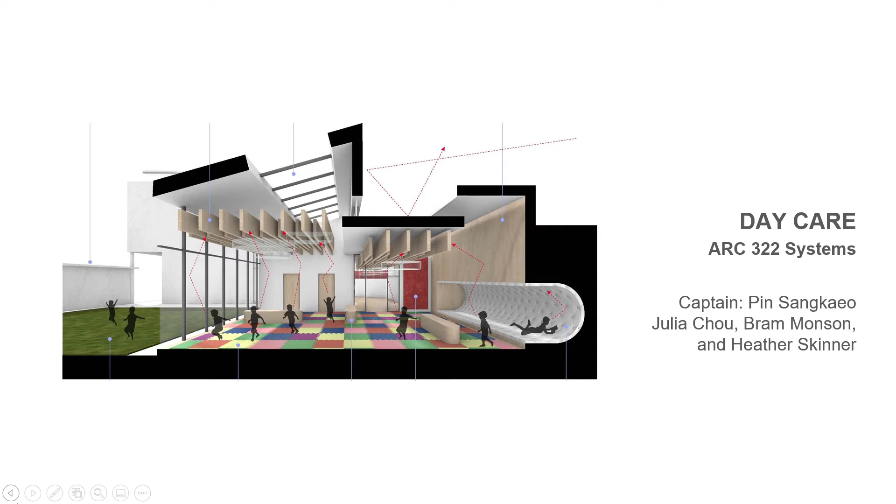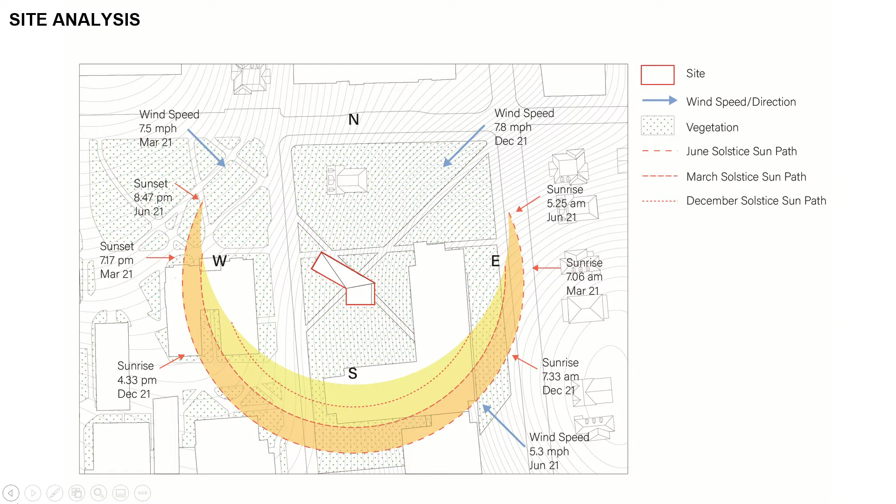Daycare addition at Syracuse University: we joined the additional spaces to the existing cafe in section and in plan. When designing for the daycare, we considered the microclimate analysis we previously analyzed for the cafe and office spaces. The daycare is accessible through the existing cafe circulation and from the exterior courtyard space.

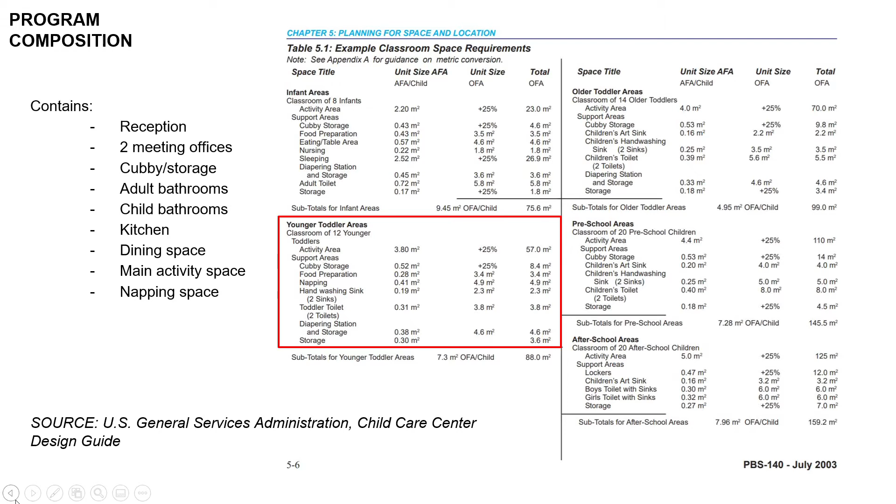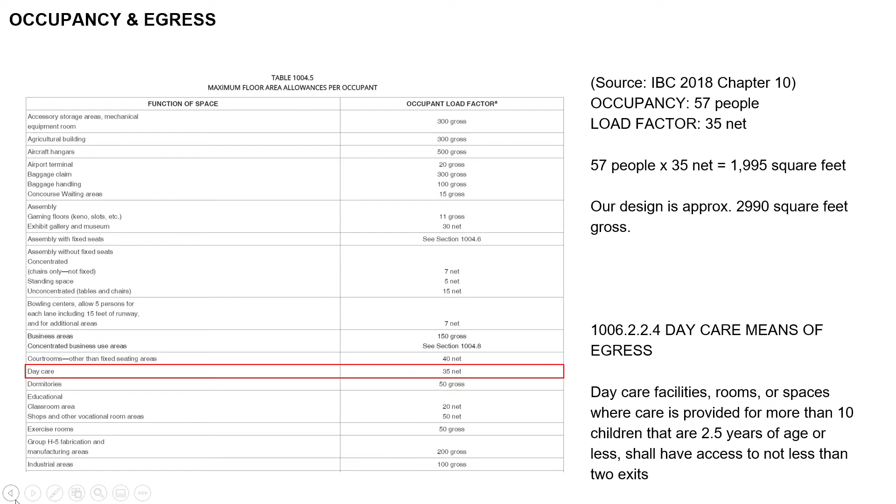The daycare focuses on incorporating high-performance lighting, ventilation, and acoustics. For the program, we incorporated a reception, meeting spaces, cubby storage, adult and child bathrooms, kitchen, dining space, activity, and napping space. The daycare has an occupancy of 57 people, and using IBC Chapter 10, we calculated an area requirement of 1,995 square feet. With the daycare program, there is a minimum requirement of 2 exits, which we have spaced at opposite ends of the daycare for accessible egress.

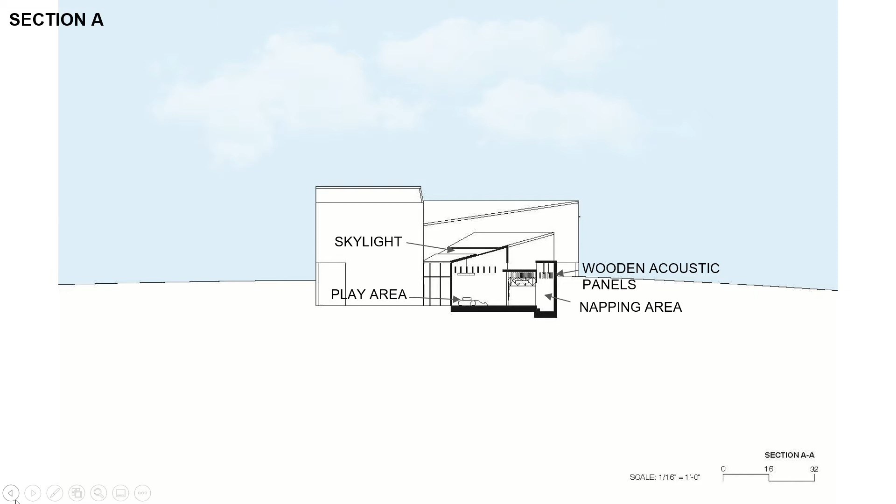The lighting, ventilation, and acoustical elements can be seen in both the sections and renders. We have called out the lighting elements such as the fixtures and skylights, as well as the acoustical elements such as the fabric and wood panels. We highlighted their relation to the individual program in the renders seen in the hallway space and exterior.

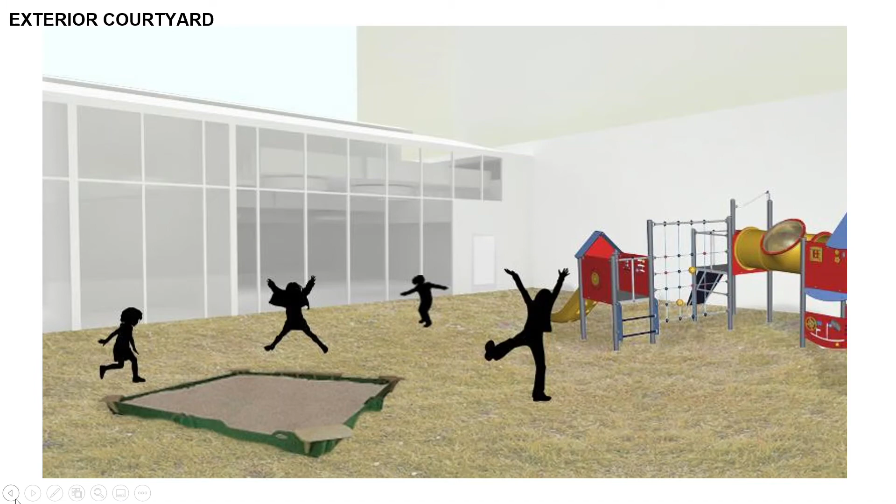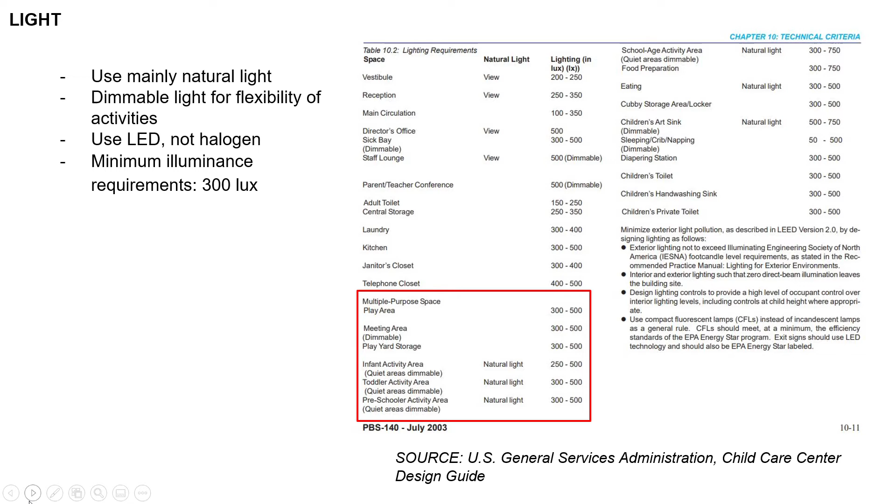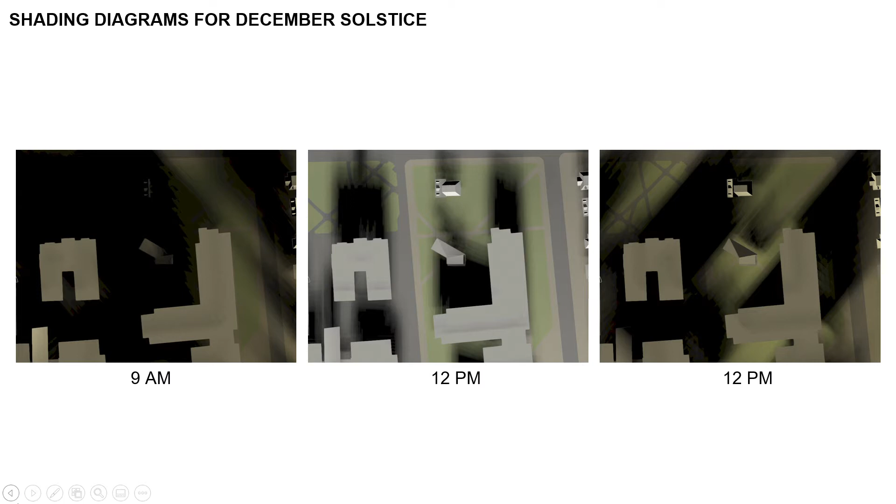The lighting for the program has a minimum requirement of 300 lux according to the U.S. General Services Administration Child Care Center Design Guide. The lighting resembles a residential environment to make the children feel comfortable. Climate consultant data shows that the natural lighting in Syracuse is not sufficient for the program to fully rely on it. We chose dimmable pendant lights to allow for the individual comfort of the lighting conditions for different activities like napping. The specific light fixtures we chose are called Ondaria 2 LED.

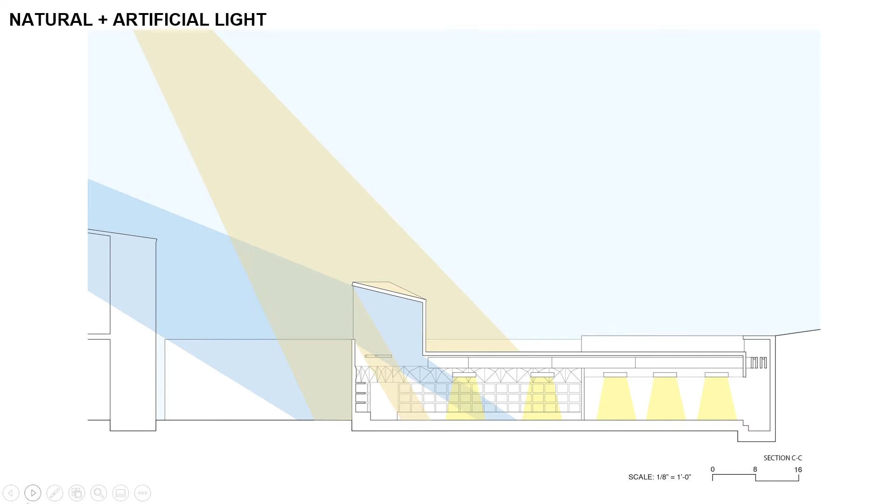Instead of fluorescent lights, we used LED lights because they are more efficient and last longer. While the main source of light is natural light from the skylights and the clerestory windows for the summer sun, these pendant lights help illuminate the spaces in the winter months. The southern facade is made up of glass to allow in lower sun angles during the winter. The acoustic wood panels also direct sunlight from the skylight above. Using this information, DIVA simulation shows the play area to have an illuminance that ranges from 250 to 500 lux at around 3 p.m. in the winter.

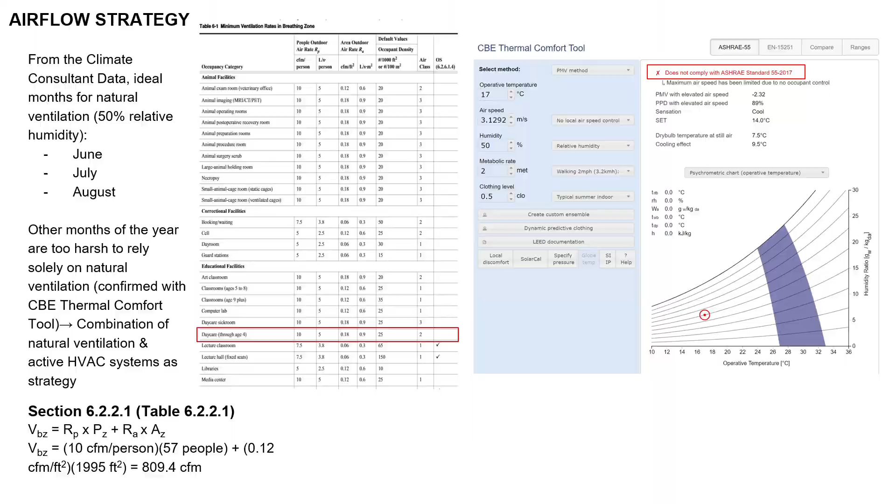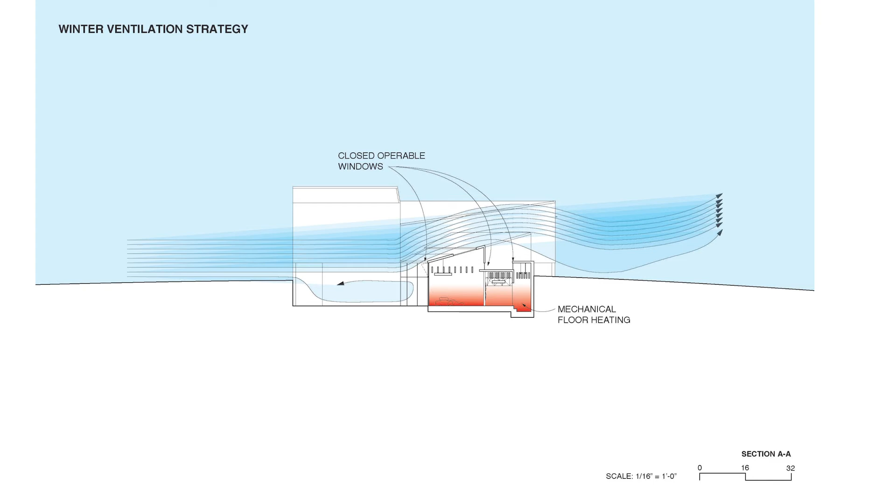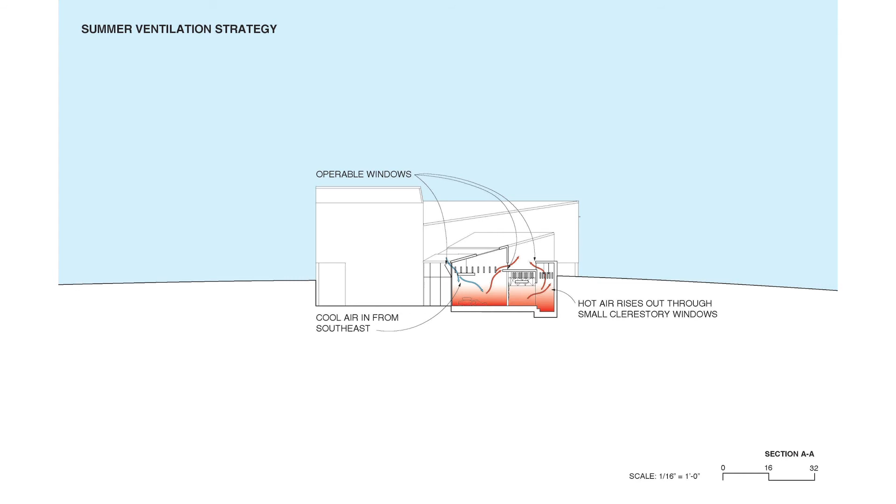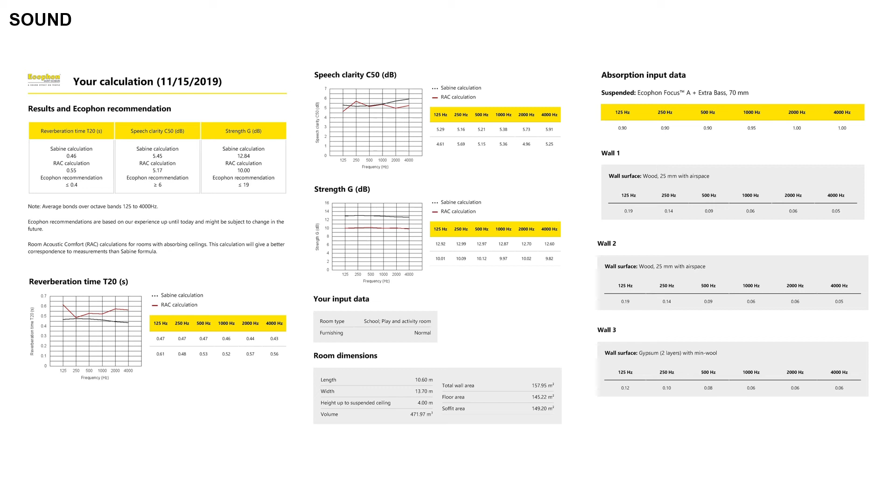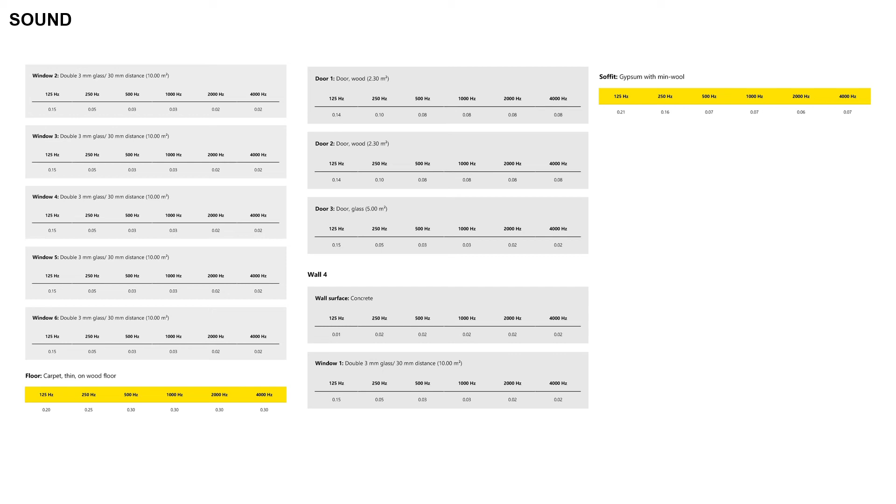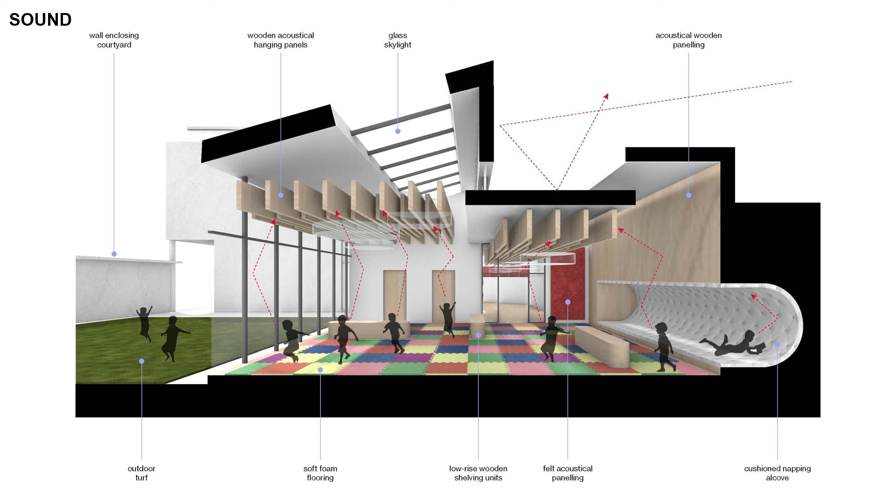Addressing the acoustics of the space, we used a variety of panels and textures to help mitigate sound from the children playing. On the floor, we used an absorbing foam padding, which works by dampening the sound of children running. There is also small-scale wood furniture scattered throughout the room, which helps reverberate sound into the space. The wood panels on the ceiling and the walls also dull the sound along with the felt panels. The wooden panels serve a dual purpose, simultaneously working to better the sound of the space and to diffuse the direct lighting coming in from the skylight.

The napping alcoves placed at the edge of this play space are padded with cushion to absorb sound from the interior and to pad the thick retaining wall that blocks the sound from the exterior. Finally, the enclosed courtyard creates visual and acoustic privacy from the foot and vehicle traffic for the children utilizing the extended retaining wall.